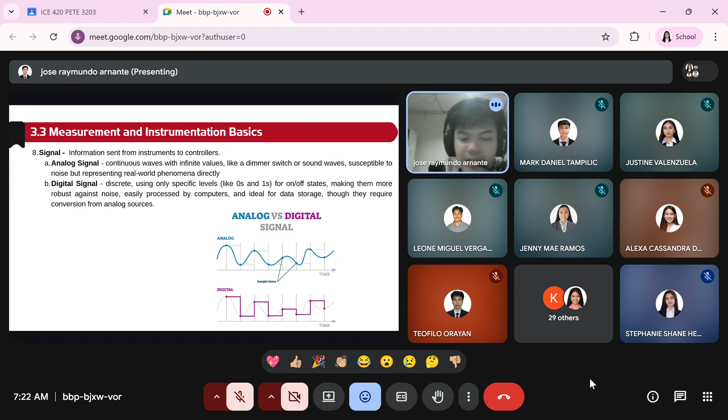Okay, analog and digital, ito yung last kong na-discuss. So let's go to range naman. Okay, dito sa range.

So range, okay, range is actually yung ating maximum upper limit versus di pala, upper limit and the lower limit.

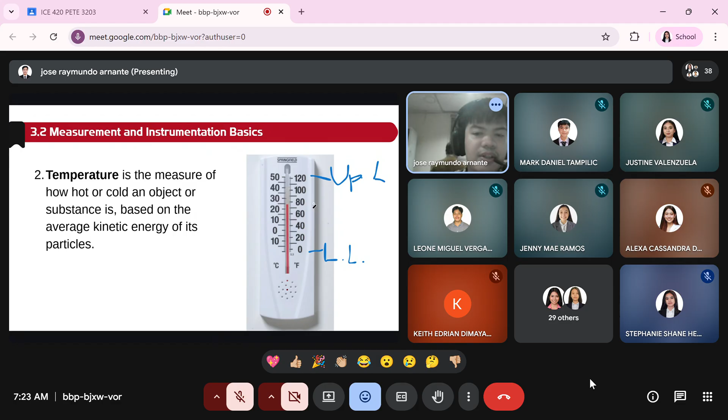Sabihin natin isang thermometer, ano yan? Pero yung thermometer dito, okay, itong thermometer, 0 tapos 120 ang kanyang maximum, so yan yung range niya. Yung ganyang pinaka maliit or the lower limit, okay, and the upper limit. Yan lang yung range natin. Di ba madali na siyang intindihin? 0, balang range dito sa thermometer na to ay 0 and then 120.

Okay, so may example ako ditong nilagay. So what if a pressure transmitter, for example, a pressure transmitter installed in pipeline has a measuring range of 0 to 10 bar. Okay, ang range niya ay 0 to 10 bar.

Okay, during normal operation, the pipeline pressure varies only 0.5 to 1.5 bar. Ibig sabihin, yung kanyang actual reading ay 0.5 and 1.5 bar.

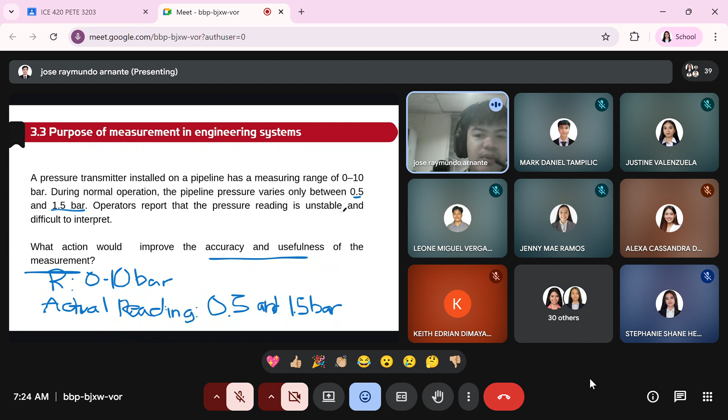Okay, and then operators reported the pressure readings unstable and difficult to interpret. So what action will improve the accuracy and usefulness of measurement? Ulitin ko ang tanong: a pressure transmitter installed in a pipeline has a measuring range of 0 to 10 bar. During normal operation, the pipeline pressure varies only between 0.5 and 1.5 bar. Operators report that the pressure reading is unstable and difficult to interpret. So what action would improve the accuracy and usefulness of the measurement?

Okay, ibig sabihin, ito lang yung part na kanyang kayang i-detect, at that part, kasi 0.5 to 1.5 bar lang. Sabi ng operator, reports that pressure reading is unstable and difficult to interpret. So what action will improve the accuracy and usefulness?

So pinaka dito, in these cases, pag ganito yung case, yung kanyang actual reading ay malayo sa range ng ating instrument or pressure transmitter. Okay, so usually ang ganyan nangyayari ay replace na lang. So replace the transmitter of a range that is mas malapit siya sa expected na actual reading.

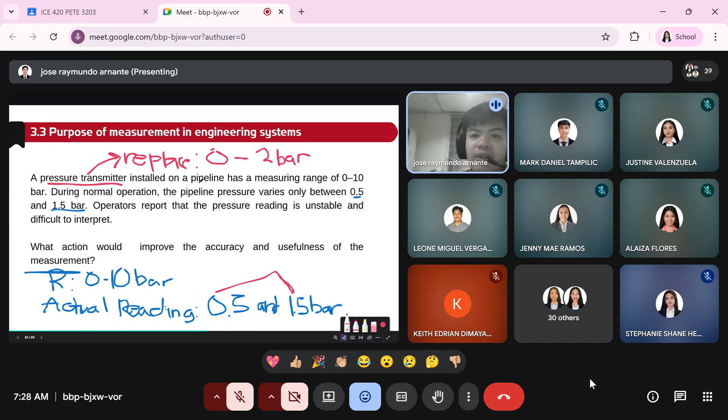Okay, so ang answer dito sa question na ito, actually, replace transmitter with a range. New transmitter having range of 0 to 2 bar.

Ayan, ito na pala yung explanation. So replace transmitter with a 0 to 2 bar transmitter. Using a transmitter with a range much larger than the actual operating pressure reduces measurement resolution and sensitivity. Selecting an instrument range that closely matches the normal operation conditions improves accuracy, signal stability, and control performance.

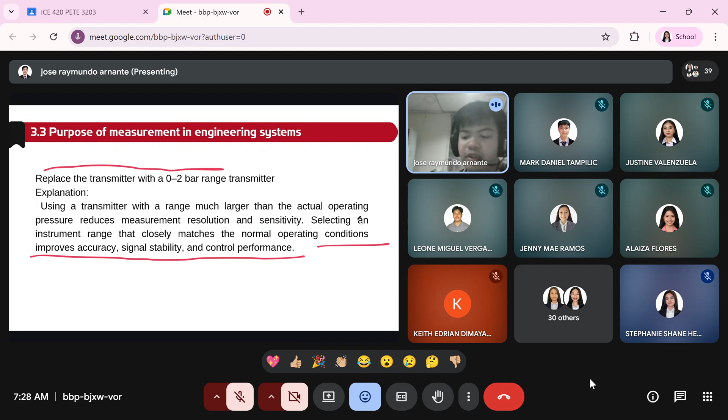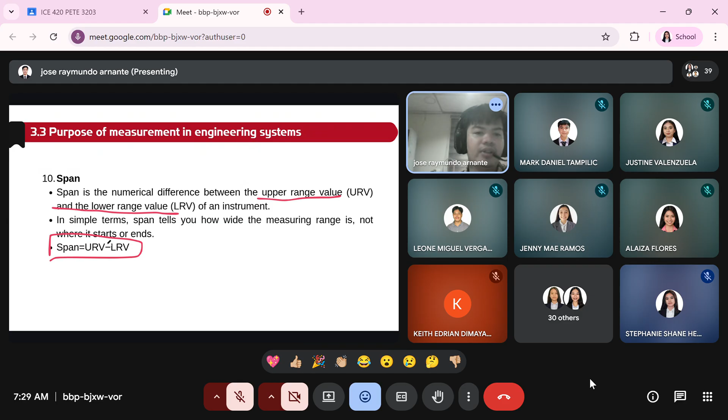Okay, so number 10 naman, span. What is span? So span is a numerical difference between the upper range value and the lower range value. Okay, parehas lang to, URV and lower range. Ito yung sinabi kong upper limit and lower limit, parehas lang sila. So in simple terms, span tells you how wide the measuring range is, not where it starts or ends. So span is equals to the upper range value minus the lower range value.

Okay, simple lang siya. So for example, dito, a temperature transmitter installed in a heat exchanger has a calibrated range of 50 degrees Celsius to 250 degrees Celsius. So the transmitter output is 4 to 20 milliamperes. So during operation, the control system reads 12 milliamperes. So what is the span of the transmitter? Why is it important in this situation?

Okay, tingin nyo anong sagot? So may choices na tayo, ano? Okay, so tingin nyo anong sagot natin?

Yes, okay, so letter B ang sagot. So 200 degrees Celsius kasi 250. So the upper range value minus the lower range, so 250 to 50. So the answer nga letter B, 250 minus 50. At ano yung explanation natin diyan?

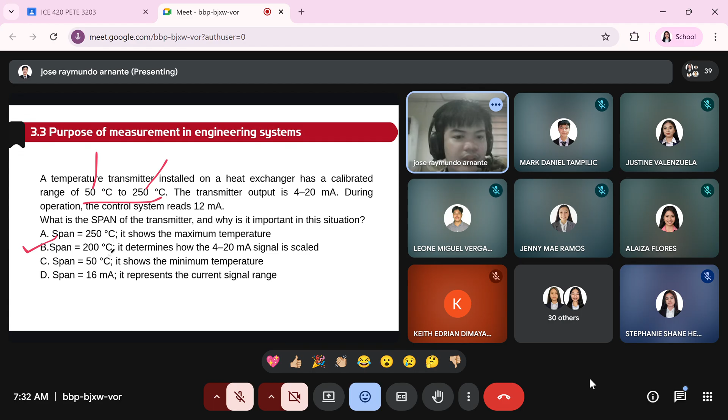Sabihin gaano kalayo yung upper range and yung lower range value.

A larger or smaller span directly affects measurement sensitivity and control accuracy. A smaller span increases measurement sensitivity, while a larger span results in lower measurement sensitivity.

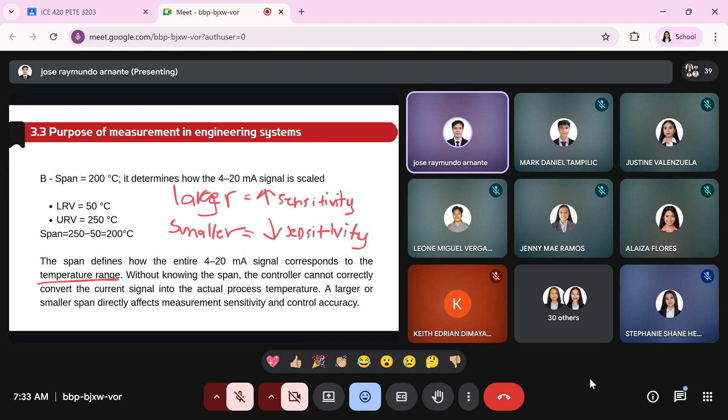Si Hans. Accuracy po ay how close a measured value is to the true value or actual value po. And the precision po is how consistent or repeatable.

Okay, tama yun. So sabi ni Engineer Hans, accuracy is how close the reading, sa instrumentation terms, is to the actual value. And precision is how consistent those readings are within one another.

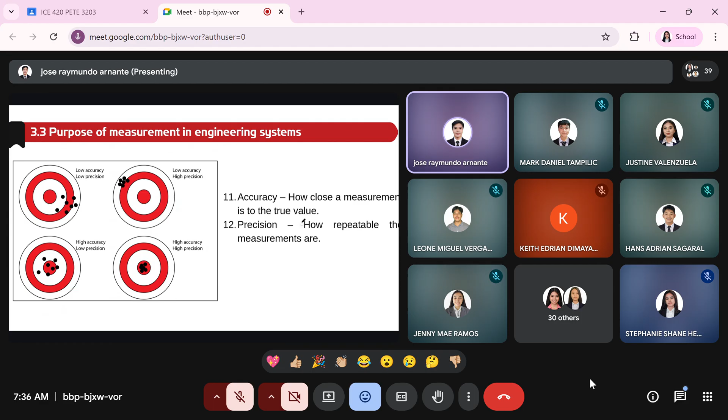Ayan, so accuracy is how close a measurement is to the true value, and precision is how repeatable the measurements are. Okay, so relating to this, I want you to get the definition.

Ito ay pressure gauge, this is a pressure gauge, diba, in bar. Pero meron siyang nakalagay dito, na-zoom ko siya - CL 1.0. So I want you to get the definition of this, what the CL mean. I-google nyo kung anong ibig sabihin yan, and I want you to explain it in your own words.

Yes, dalawa, dalawa na. Sige, search nyo yun ha. So I want you to explore. Kukuha lang akong cake dito.

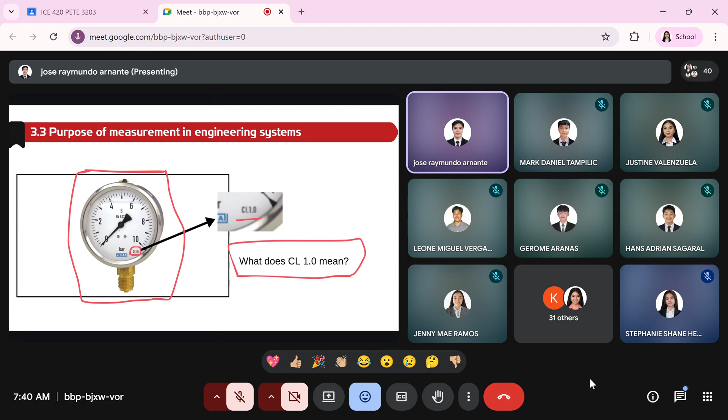Okay, tama yun, tama si Sir Gerome. So sabi niya, yung ating pressure gauge, ito, may nakalagay CL 1.0. So class yan - ang CL, that is class. So class 1.0. Okay, yung ibang class ay hindi siya directly 1, ibig sabihin 1%, na siya.

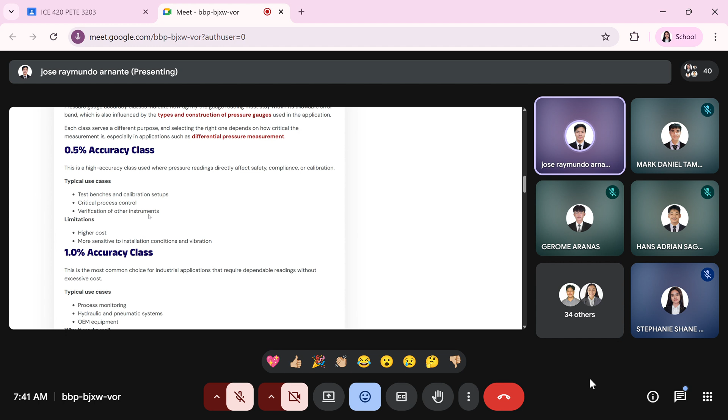Okay tama. So meron tayong iba't ibang class - share ko tong tab nito, for additional information lang. So dito, meron ibang 1.0, yung iba ay 0.5, yung iba naman yung 1.6. Pag 0.5, ginagamit siya sa test bench, calibration setups, verification of other instruments. Yung 1%, halimbawa ko sa meeting kanina, siya yung ginagamit sa process monitoring and hydraulic and pneumatic systems - ibig sabihin tubig at air. Pag 1.6 naman, utility lines - yung mga steam, nitrogen, air, instrument air, and non-critical monitoring points. Ibig sabihin, ang pinaka-critical, yung 0.5 - critical process control, yung accuracy niya ay 0.5 lang.

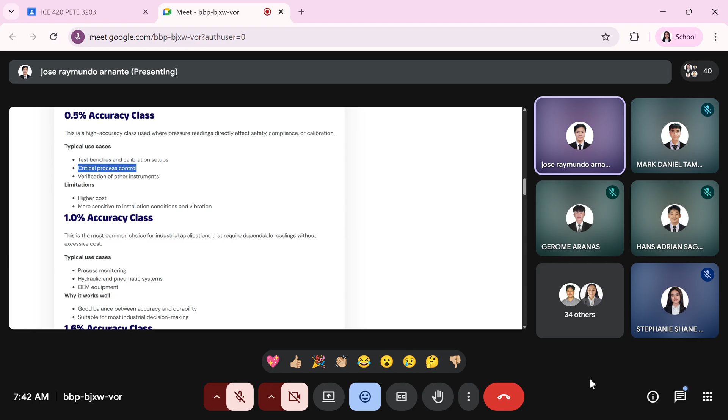Sabihin 0.5% yung kanyang margin of error - parang margin of error na lang din siya. Balik tayo dito - sabihin, 1% ng 10, ano, siya ay 0.1. So kung ang reading mo ay 6, ang reading mo, kunyari itong point na ito, lumipat siya dito sa 6, ang reading niya 6 bar. Pero ang actual reading niya talaga, it can be either 6 bar, 6.1 bar, or it can be 5.9 bar. Okay, yan yung ating class meaning, class 1.0.

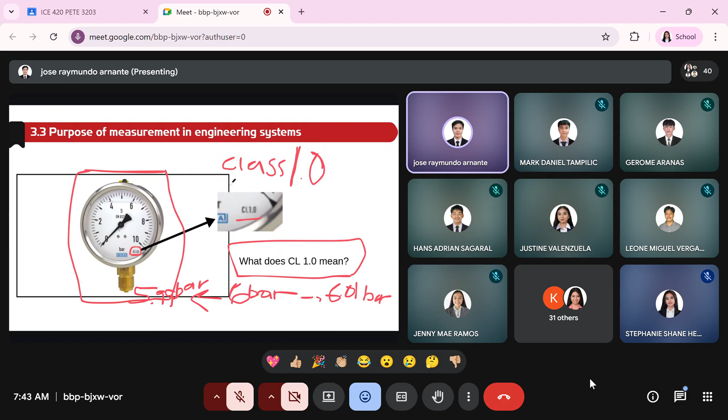So ito, 2 bar, what could be the actual pressure? Ulitin ko lang - pag kunyari, CL natin, class 1.6%, sige identify nyo. Class 1.6%, tapos yung kanyang range ay 0 to 10 bar.

Okay, maximum niya ay 10 bar. So ano kaya ang kanyang range? Ay kanyang actual pressure? Pag 2, 5, and 8. Ano? So kunin niyo, i-compute niyo.

So 1.6, ang class 1.6 na siya, ibig sabihin 1.6% na siya ng maximum reading natin.

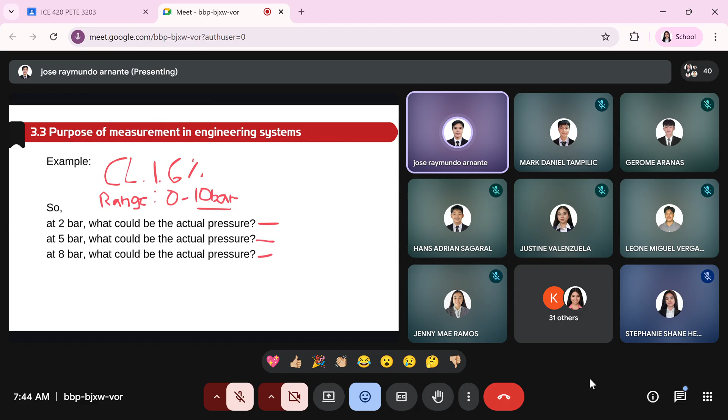Sige, si Renz Cyrus. Sir, sa 2 bar po ay ang actual pressure po ay pwede pong mag-range ng 1.84 bar hanggang 2.16 bar po. Okay, so 16%. Ay, so 0.16, 2.16 bar po. Okay, sige, tama.

So pag 5 bar naman, 5 bar po ay 4.84 bar hanggang 5.16 po. Okay. Tapos sa 8 bar po ay 7.84 bar hanggang 8.16 bar po. Okay, sige, tama yun.

Ito may mga nag-recite. Ano? Si Renz, si Gerome. Sino yung nauna kanina? Anong pangalan niya? Si Hans. Okay, si Hans. Wala. Okay.

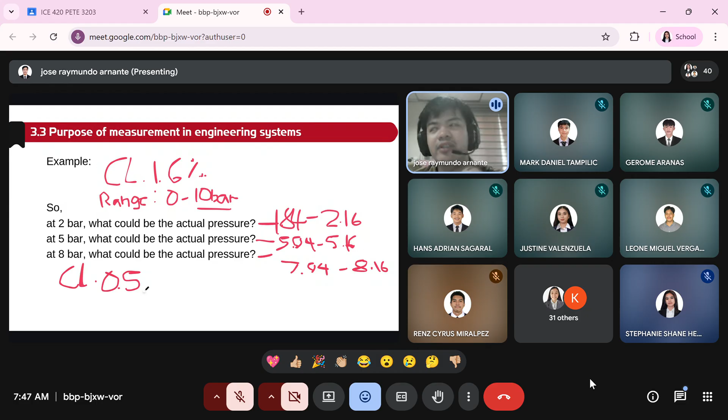Pero pag yung mga CL 0.5, CL 0.5. Okay. Pag sa calibration, ginagamit yan. So sa instrumentation team, ginagamit nila yan. Okay. And next is sensitivity naman.

So the sensitivity is the amount of change in the instrument's output signal for a given change in the measured input. So this is equals to sensitivity change in output over change in input, or pwede naman scale deflection and value of measure and producing deflection. Parehas lang yan dito, iba lang yung kanyang term.

So here, so a level transmitter is installed in a tank and has two possible configurations. So number 1, transmitter 0 to 10 meter range, and number 2, 0 to 5 meter range, or 4 to 20 milliampere. So siya ay level height ang kanyang mini-measure, so meter yung kanyang unit. Okay, so the tank normally operates between 2.5 and 3.0 meters.

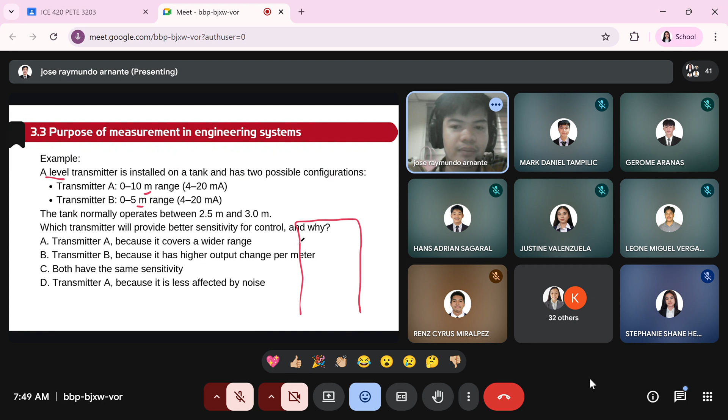Okay, so meron tayong dalawang level transmitter, ganito siya. So this is transmitter 1, and the other one is the second transmitter. Ito ay A, ito naman ay B. So which transmitter will provide better sensitivity control and why? So may choices tayo dito. Okay, so tingin nyo alin dyan sa choices ang tama.

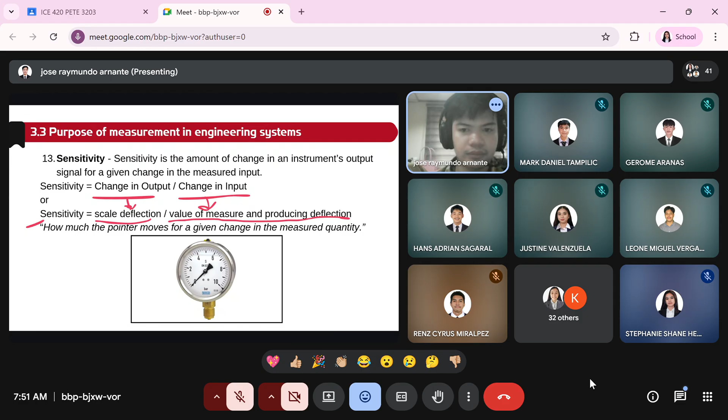Okay, so ulitin ko yung ating definition ng sensitivity. This is the amount of change in the instrument's output signal for a given change in the measured input. Okay. So, ang nakalagay dito, how much the pointer moves for a given change in the measured quantity. Kumbaga ito yung pointer natin, biglang nagkaroon ng measurement. Okay, so how much does it move? Kumbaga sa physics, yung kanyang displacement. Okay, so how far from one point to another point?

So dito, nakalagay dito ay meron kasi tayong dalawang transmitter. Yung isang range ay 0 to 10, yung isa naman ay 0 to 5. Ang tanong dito, which transmitter will provide better sensitivity for control and why? So tingnan natin yung sagot ay actually letter... Okay, so kalagay dyan ay correct answer is B. Okay, so yung B sa choices ay B. So bakit? So transmitter A, sensitivity natin, yung kanyang input, yung kanyang output.

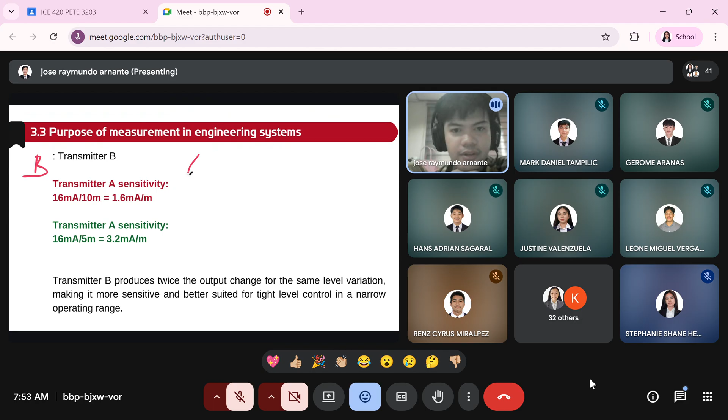Sana tayo. Ayan, so kanyang, like yung dito yung kanyang formula, okay? Change in output, the change in output over change in input.

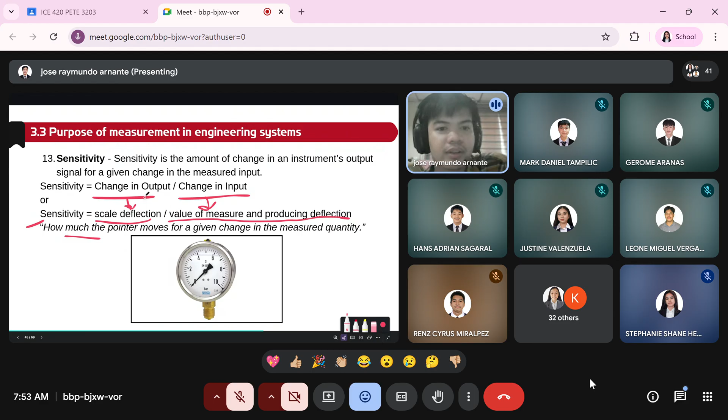Okay, so ano yung output na sinasabi natin? Hindi ata na-define dito kung ano yung output. So yung output natin, yan yung ating, ito. Kasi transmitter siya, di ba? Di ba ang transmitter natin? So, transmitter. Papasok ka ng, sa transmitter, ang input sa transmitter ay yung ating measurement from a transducer or a sensor.

Okay, so from a, sabi natin, transducer. Okay, transducer signal. Okay, di ba meron tayong sensor? Yung sensor, kumukuha siya ng direct contact to the physical element. So sabi natin yung sensor naka-measure siya ng 5 bar, i-convert ng transducer into a voltage or resistance. Okay, sabi natin ay 5 volts input, or at this point, o yung sensor natin nakadetect siya ng 5 range. Okay, or anywhere in between this meter. Yung transducer convert niya to a voltage, and then yung transmitter convert niya to 4 to 20 milliamperes.

Okay, so ibig sabihin, yung ating 4 to 20 milliamperes ay yung ating output. That is our output. And then, dito siya. So, change. Okay, so ano yung difference ng 4 to 20? That is 16. Okay, so difference ito ay 20.

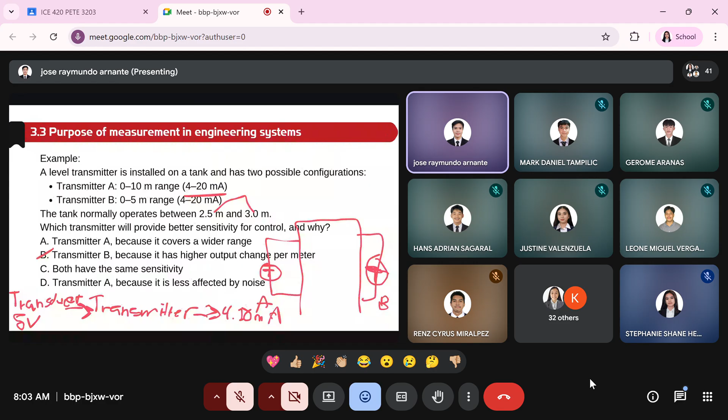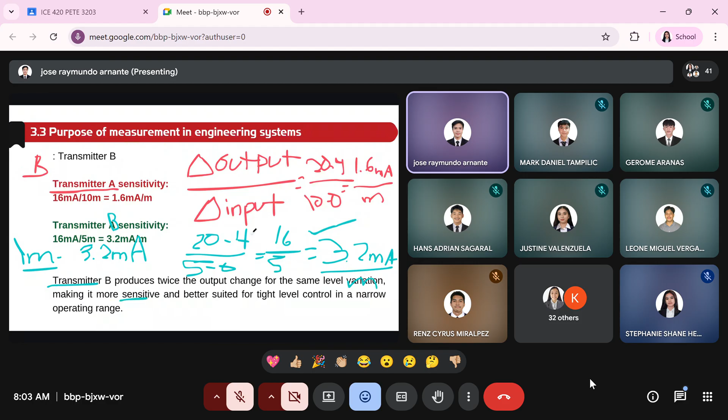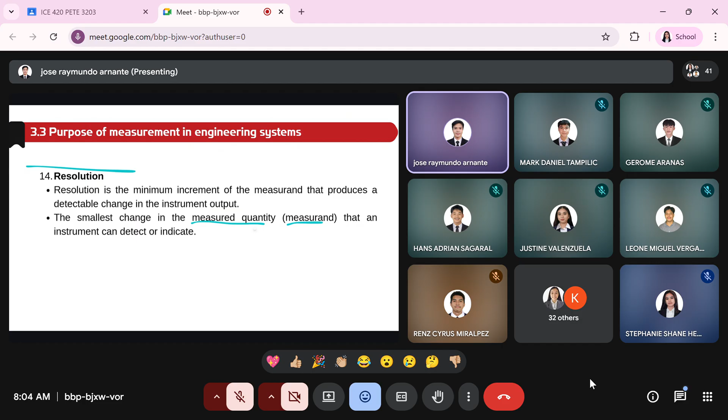So tingnan natin sa question na ito. Dito 2 bar daw yung sagot. Bakit 2 bar? So 2 bar, ang ating equation dito ay you have to divide the 100 bar by 50 division. Okay? Kasi yung ating measuring range na 0 to 100, mahirap siyang i-draw. Pero yung division niya, yung scale niya, ay 50 siya.

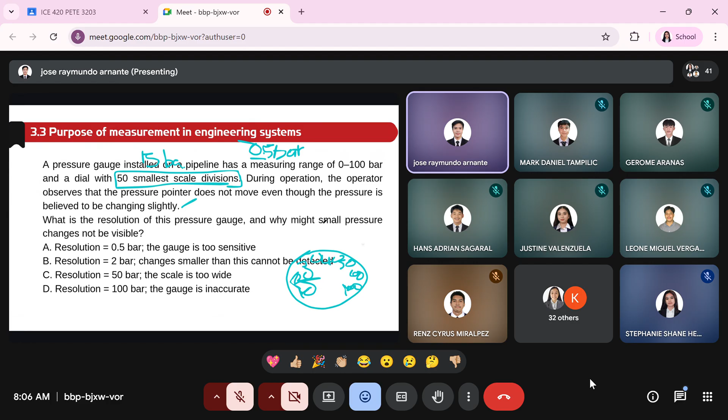So this means a smaller, ito ang ating equation ay, yung ating maximum range niya is kanyang maximum 100 bar over the number of divisions. So yan is equal to 2 bar. This means the smallest pressure change the gauge can visibly indicate is 2 bar. So any pressure fluctuation smaller than this value will not cause noticeable needle movement even if the process is actually changing. Ano? So ulitin ko ano. So yung ating resolution is 2 bar ano. Pero pag ang kanyang reading ay less than 2 bar, ibig sabihin yung needle natin diyan hindi siya gagalaw.

Hindi siya gagalaw. Pero kung kunyari yung kanyang reading ay nag-increase or decrease ng sabi natin 2.5, there will be a noticeable change or movement of the reading in a pressure gauge. Okay, sana naintindihan niyo yun.

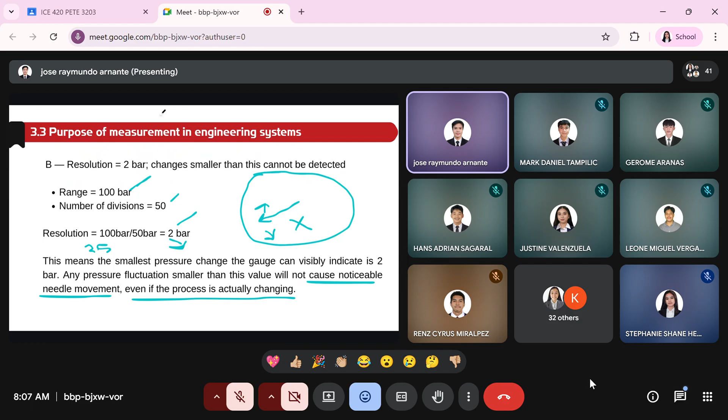So we have here repeatability naman. This is the ability of an instrument to give the same output when the same input is applied repeatedly under identical conditions.

Okay, so for example, a pressure transmitter is tested at 5 bar, 5 times. So it gives 5.01, 5, 5, 5.02, 5.01 bar. So the readings are very close. Ibig sabihin, it has a good repeatability.

Okay, so medyo parehas lang siya sa ating precision. Precise siya. So in instrumentation na term, precise is the same as repeatability, di ba, kasi pareho-pareho lang yung value na binibigay. So linearity naman...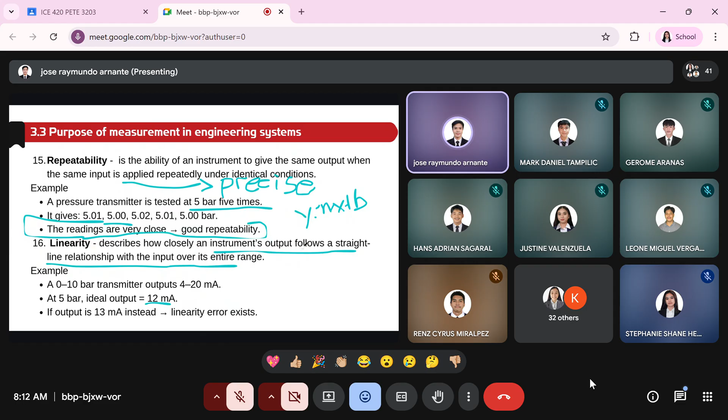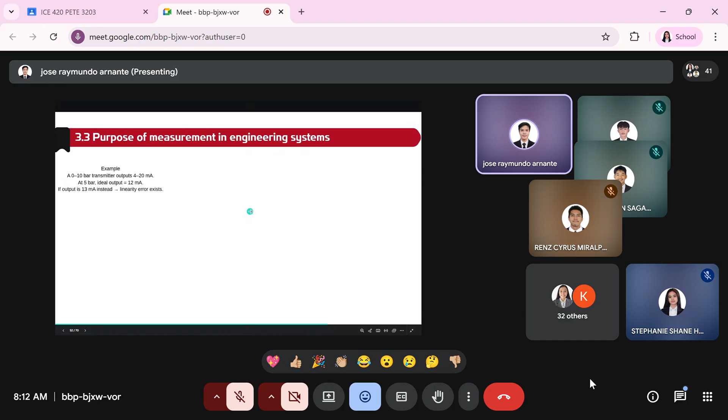So we can use the interpolation, linear interpolation technique. Okay, paano natin siya i-check? Lagyan natin siya sa table. Nakalagay dito ay lagay ako ng X and Y, kasi nasa graph natin X and Y.

Lagay natin yung pinaka mababang value sa X. X is for the pressure and Y is for the milliampere. Lagay ko dito bar. So for the range ng bar, 0, and 10. Yung gitna niya ay 5. Ito naman, 4, 12, and then 20. Sabihin natin, so at 5 bar, ideal output is 12 milliampere.

So check natin kung 12 pa talaga. Okay, so we can use linear interpolation. Sa linear interpolation, sa calculator ituturo ko na lang siya sa face to face. Pero kung dito, you can use this formula. Sa formula, so natin y2.

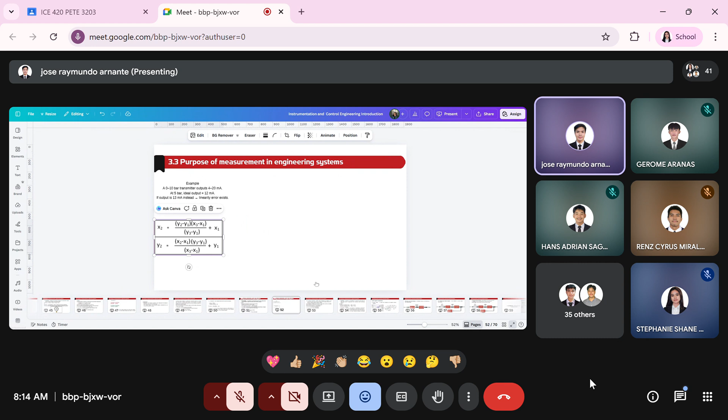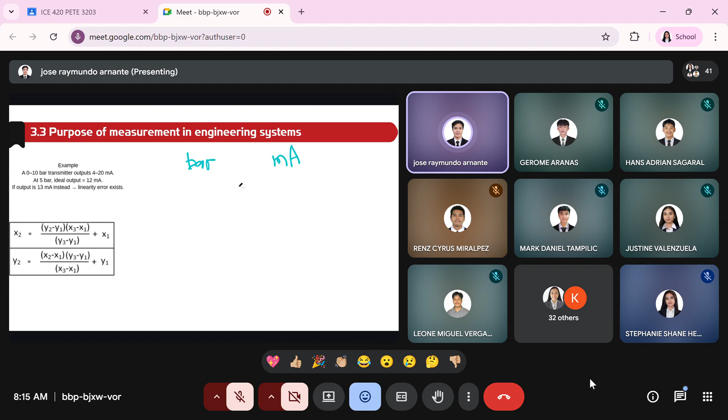Okay, so bar, and then X and Y. X1, X2, and then X3. Ito naman ay Y1, Y2, and then Y3. Yung ating X1, 0, X2 ay malapit, so 5, and then 10. Yung kanyang Y1 naman dito, so 4, so 12, and yung ating 20. Okay, so I want you to try this.

Hanapin niyo yung Y2. I-check niyo kung 12 ba talaga ang kanyang output. Okay, nakuha niyo? So tama, di ba? 12 naman siya. Itong interpolation nito, ituturo ko na lang sa calculator sa ating face-to-face, pero ito yung kanyang equation. So tama, kung yung ating transmitter naka-receive ng 5 bar na pressure, yung kanyang output ay magiging 12 milliampere.